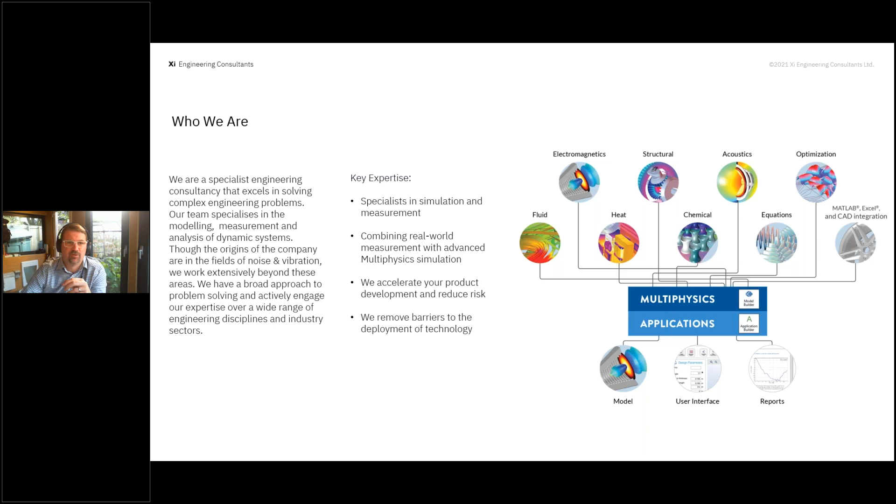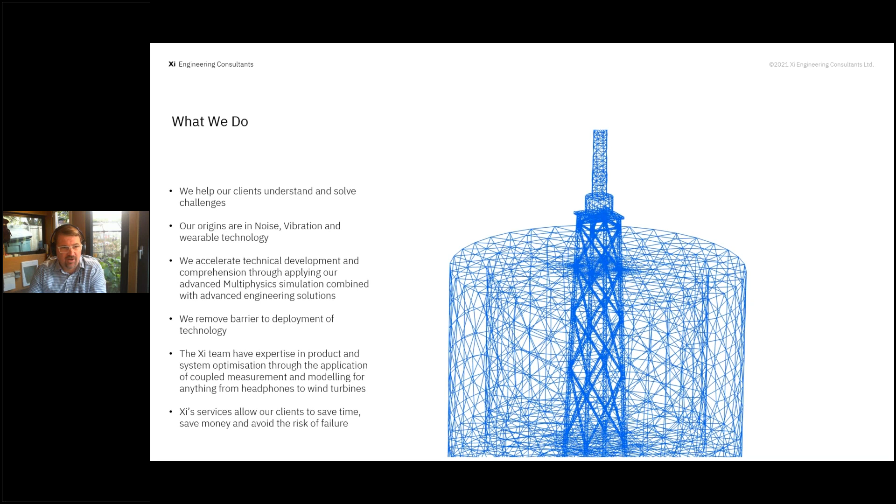Our origins were actually in noise and vibration. We spun out of Edinburgh University, where we did a lot of complex dynamic engineering. This has allowed us to improve our skills and capabilities to allow a lot of offshore deployment to be taken forward, removing environmental barriers. Sorry, I have a dog in the background. Xi Engineering, the name Xi comes from a damping ratio. We're a technical team, and we decided to name ourselves after a technical variable we commonly use in our work.

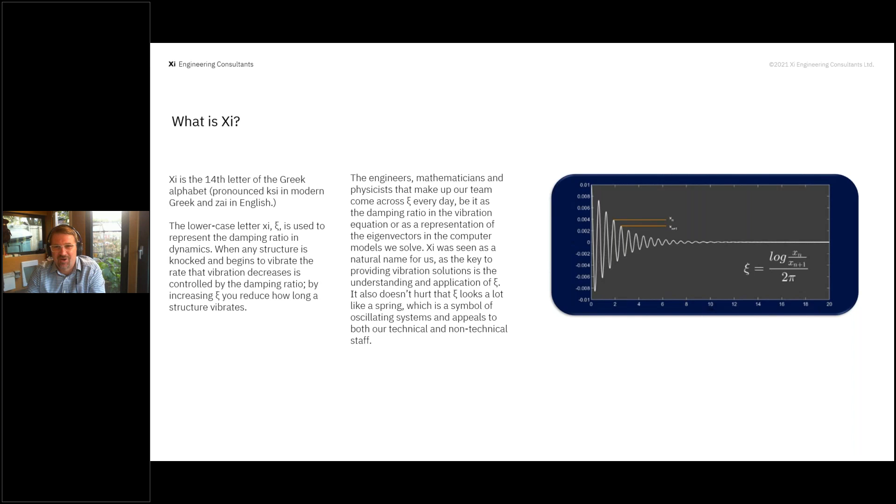As I said, we merge the virtual and real world. I'm going to give you a couple of examples of some of our digital twins and why they were produced, then some projects specific to the offshore wind sector. We worked with GE Renewables over in Germany, and they wanted to improve their wind turbine performance, specifically with relation to noise and the acoustic emissions. So what we did with GE was develop an acoustic model, a full holistic system. We measured in the real world, combined the two, and then we were able to optimize their system to reduce the acoustic emissions of the devices, allowing for increased deployment of the system.

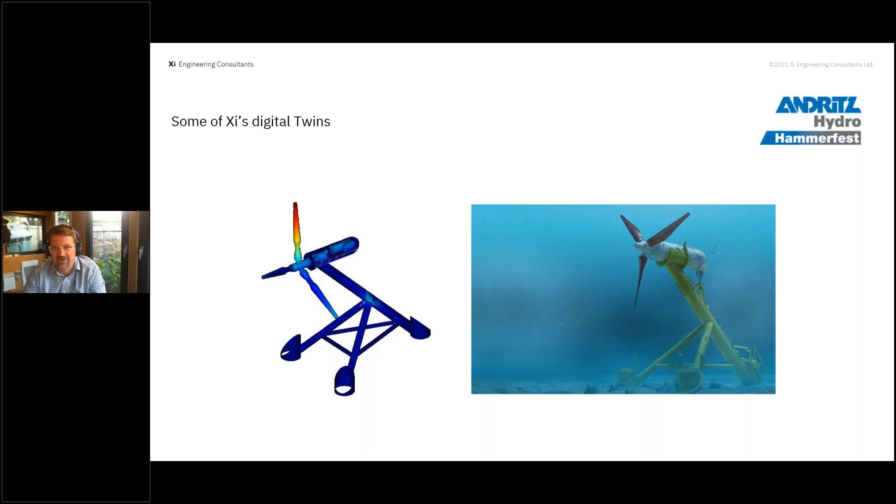Another example of a project we've worked on, this is Andritz Hydro Hammerfest. They have produced 3 versions of tidal turbines, the one on screen is the HS1000. We assisted the manufacturer in optimizing their system for being maintenance free - they wanted a 5-year maintenance-free period. During the design phase, we were integral in terms of reducing the fatigue and the likely maintenance requirements. At the same time, we were able to predict the acoustic emissions of the devices, which then allowed them to deploy these devices, understanding what the signature would be and how it would affect marine life.

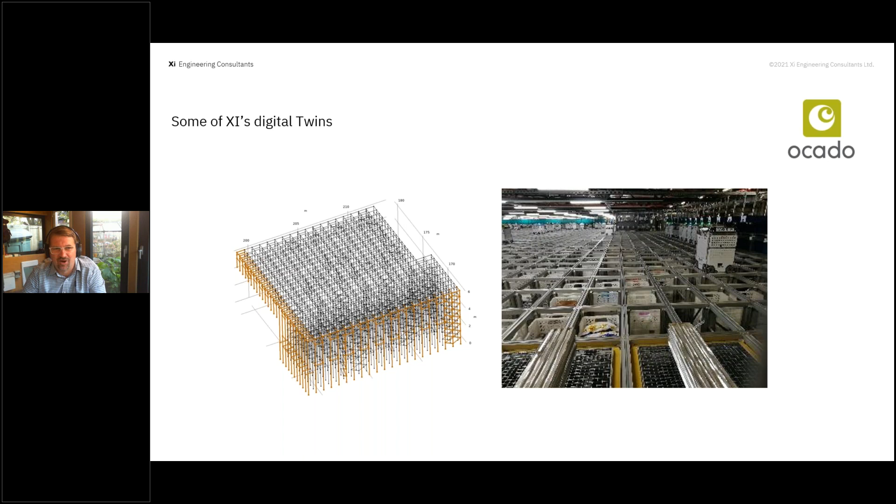And the last of the digital twin examples - this is clearly not offshore wind, but we work with Ocado Technologies, who are developing a robotics-based logistics system. This is a huge digital twin, some sort of 300 meters by 300 meters, in order to optimize the device for deployment across the globe.

So moving to the specific area we're concerned with today, in terms of EIAs, I'm sure you're all aware of the EIA directive, which everybody works to within this field; certainly Scotland has its own take on this. Each of the different regions will do. And really, you've got to cover what all the impacts are going to be of a deployment of offshore wind. And the project's likely significant environmental effects need to be considered. A few of these I will now cover in this presentation.

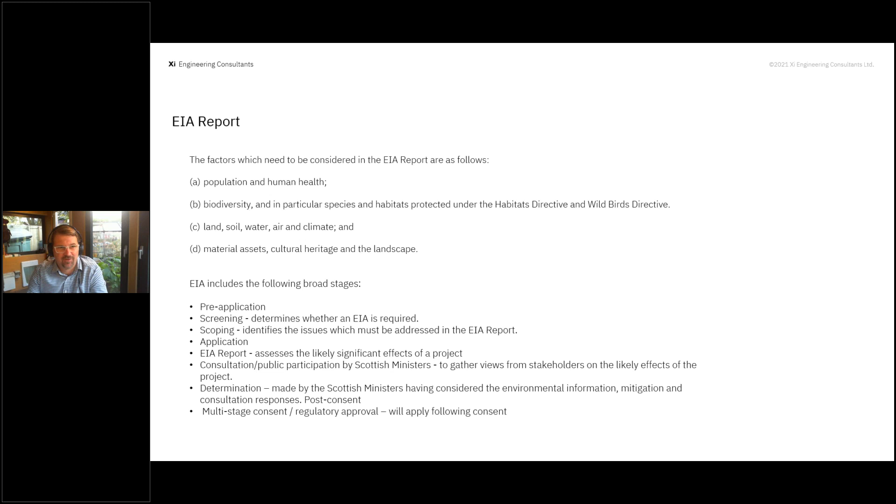As a summary for what's required in an EIA report, obviously it needs to cover a number of factors, you know, what the likely impact is on the population and human health. Biodiversity is one of the key concerns and the key areas we assist with in terms of ensuring that the likely output or the predicted output will not cause an issue to different habitats. Then you're covering basically land, soil, water, air and climate. And then obviously any material assets or cultural heritage must be considered through this process. But I'm sure there's plenty of people going to cover this in greater detail later on.

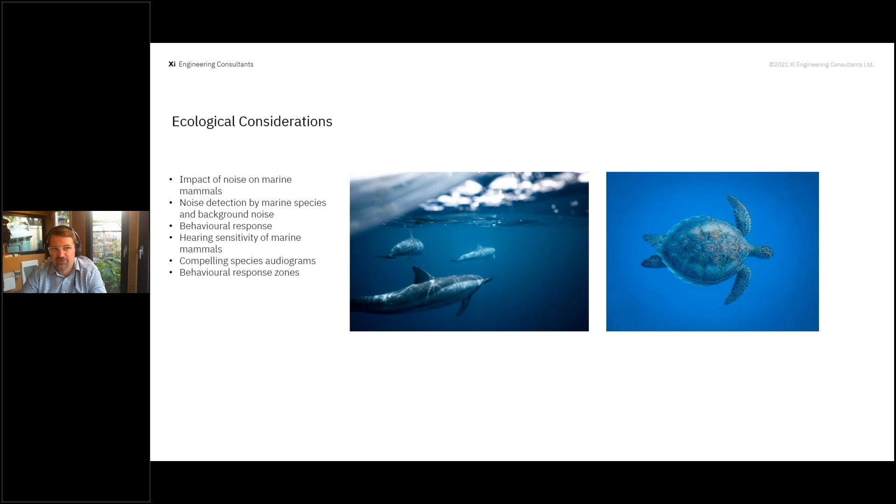So in terms of ecological considerations, you need to look at the impact of noise on marine mammals. You've got to look at the noise detection by these mammals. So can they hear it? Or what level would they hear it at the different receptors? And is there likely to be a behavioral response to this? Certainly from deployments we've done, we need to ensure that the marine species are aware of what's going on, but obviously not to a level at which you're likely to move a population because it's been too noisy. You've got to look at the hearing sensitivity of the marine mammals. And what we do is look at the species audiograms and then assess what the likely behavioral responses are.

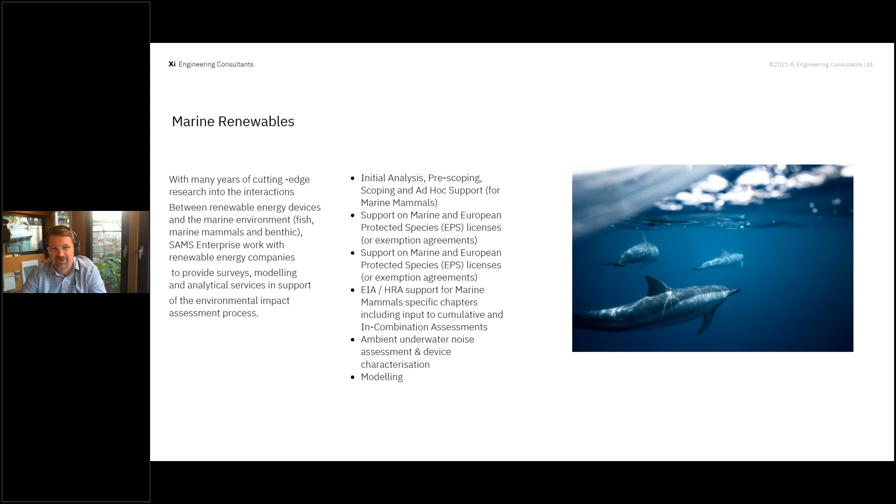So in terms of marine renewables, you need to cover a number of steps, looking at initial analysis or pre-scoping, which we and our partners can provide support for. Looking for support for the marine and European protected species, which are key to consider, and we look at the audiograms of all of these when we're predicting the noise levels. The EIA and support for marine mammals, covering specific chapters, and then looking at both the ambient underwater noise and the likely effects during construction, operation, and decommissioning. And we do that through some extensive, accurate modeling.

So to give you an example of some of the underwater projects, I'm going to run through them before I finish up, and then I'm happy to take questions. But we cover areas such as piling noise, so we're able to predict the piling noise and what the likely effects are. The operational noise of wind turbines, the foundation effects of offshore wind turbines, tidal turbine operational noise. Obviously, we're focused on offshore wind here. But then you've got to look at the facilities onshore as well, so whether or not facilities onshore are going to affect marine species. You've then got cable laying and the noise that might be an issue there. And within the UK, we have to look at what the Ministry of Defence, the MOD, requirements are. So you can see on screen here a picture of the HS1000 being deployed, and the sound production of the device, which we can simulate and combine with the bathymetry in order to show what the effects would be, whether it were deployed as a single device or multiple devices.

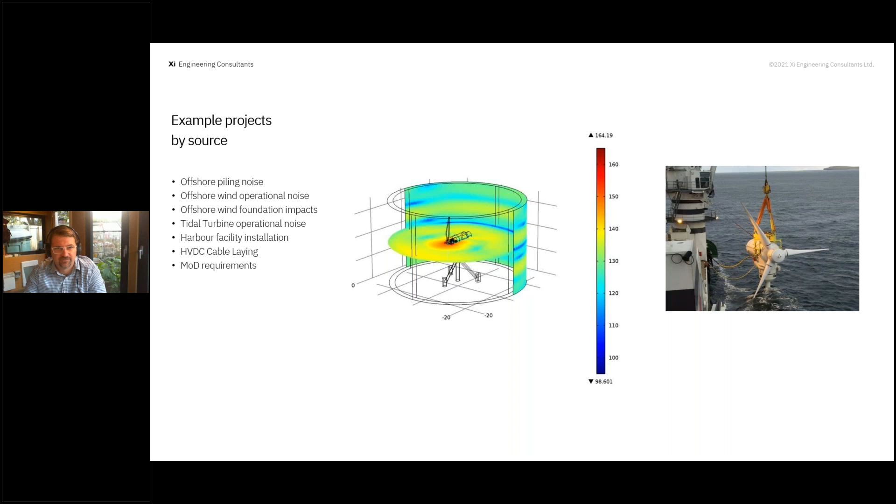We've done extensive work with the Scottish Government and Marine Scotland. One of our publications is available on the Scottish Government's website, if you're interested; there's a link in this presentation, so hopefully it will be distributed at the end. What we looked at here was what the different effects of operational noise would be for different types of offshore wind turbine foundation. So we looked at pile foundations, gravity-based systems, and jacket systems, and how each of these would impact the different species.

So as I said, this report's available. I've got some of the highlights here from it. So we have on the screen the sound pressure levels at different frequencies as produced by a pile foundation. Obviously these are device specific, but we're quite happy to produce these for any scale of turbine so that the consenting authorities understand what the operational noise from these turbines is likely to be, and the effects that they have on the different species.

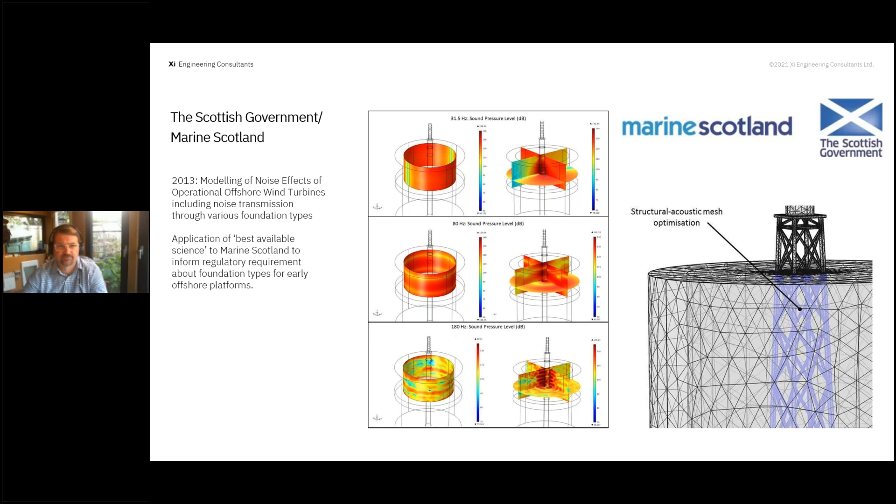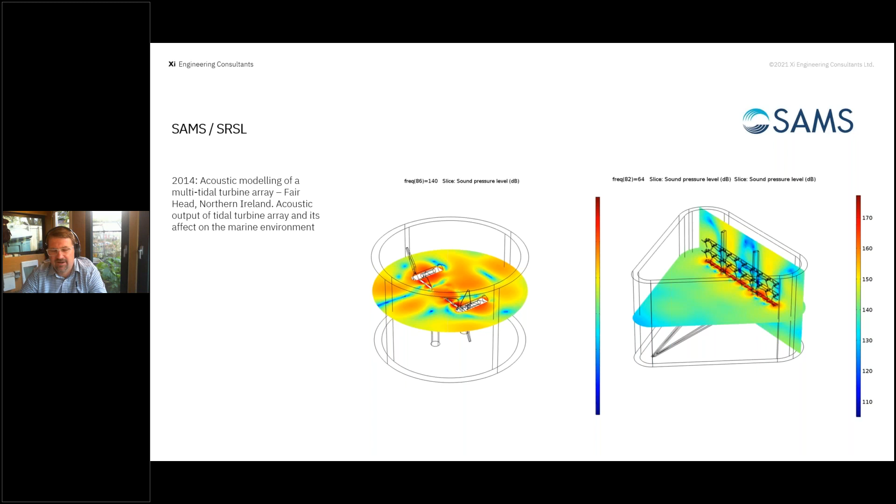Another underwater project, this one we worked with SAMS and SRSL. So again, this is tidal devices, but we were looking at how different devices underwater would affect the different species, again through producing a propagation modeling capability, and then we put this into the bathymetry, and then you're able to see what the likely effects are.

I think I've covered the Andritz Hydro Hammerfest, but here was a specific site in terms of the noise propagation. To the left of the screen, you can see the effects of multiple devices deployed simultaneously by the islands of Islay and Jura over in Scotland.

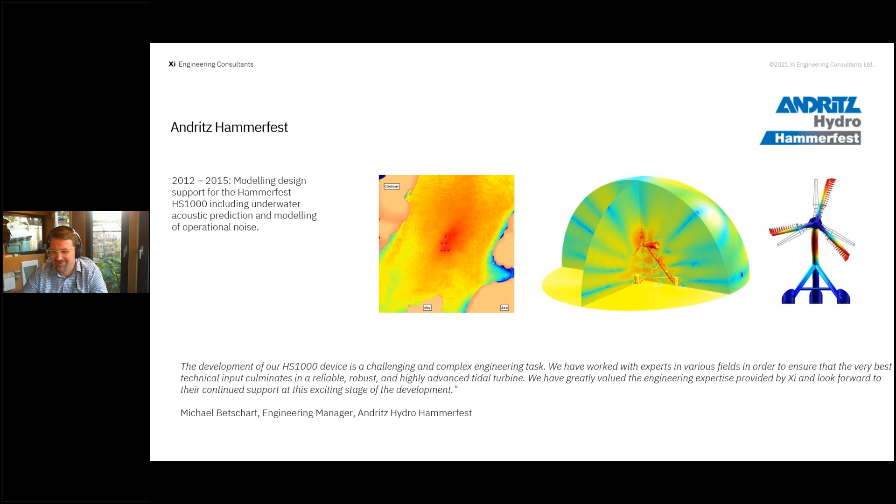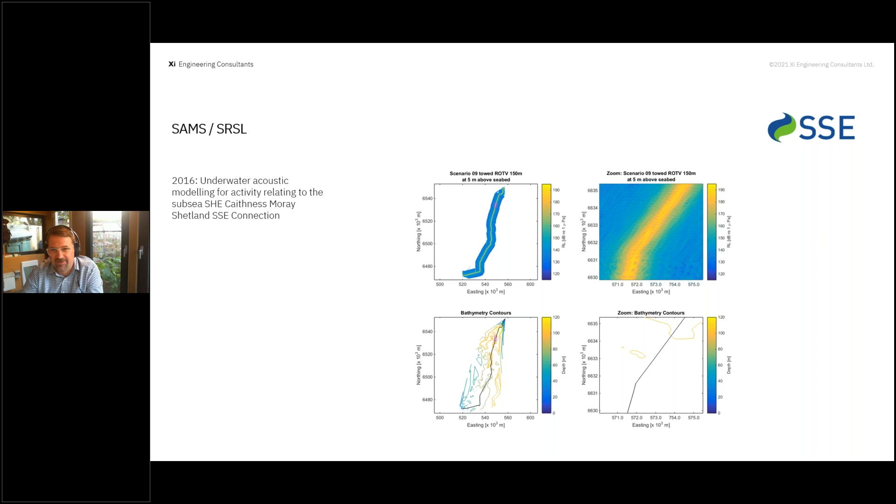Obviously, when it comes to cable laying, it's another area you have to assess during your EIA. And we've worked with numerous companies now. This one was specifically for SSE, again with SAMS and SRSL, where we were looking at the impacts of the cable laying and activities in getting the cable to the Shetland connection up in the north of Scotland. So looking at the different activities, we combine it with the bathymetry, and again we can propagate the noise, and then we can also see what the effects are on the specific marine species.

Another underwater tidal device, this is the West Islay Tidal. What you can see is a sound pressure level created by different numbers of devices deployed on the seabed, combined with bathymetry, and once again we'll then look at how that impacts on the specific species, looking at the different mammals, dolphins, whales, and also migratory fish, such as the salmon, sea trout, and the eels.

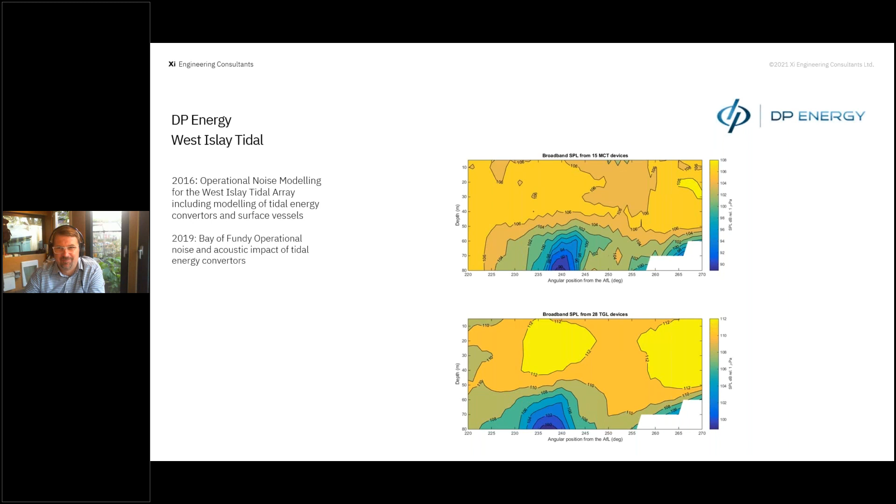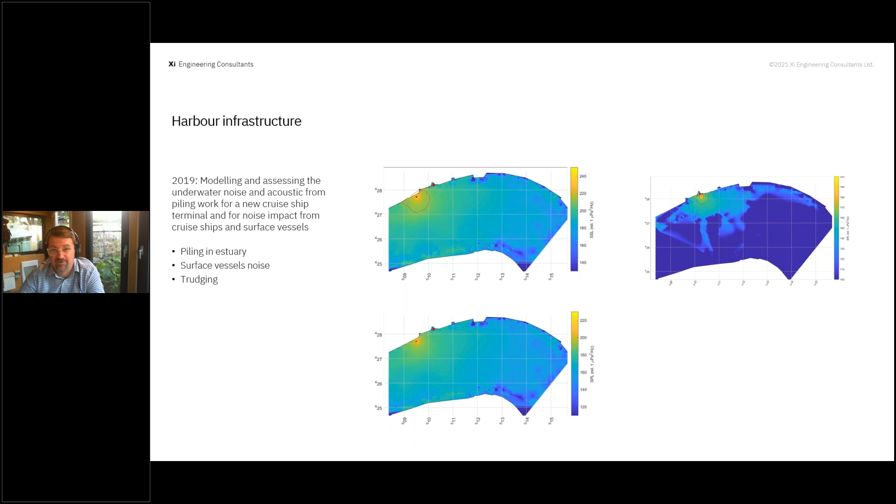So once again, we look at what the activities are going to be, and we can produce the underwater noise impact from the piling and the onshore activities to ensure that planning authorities allow for these to go forward. So you've got piling in the estuary, you've got vessel noise as well, and dredging running through.

Oh, sorry, I've rattled through that presentation, so I'm slightly ahead of time. My apologies. Hopefully I've covered all those points, but would happily take any questions on predicting offshore noise and acoustics in order to allow for your deployment of offshore wind.

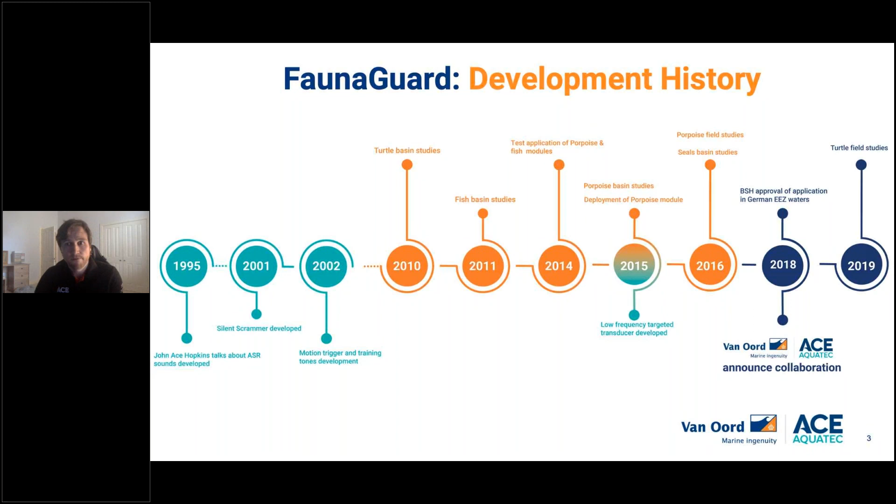So within the partnership, we are responsible for dealing with client contact, shipping, servicing equipment, as I said, and Van Oord have been largely responsible for the networking, communication, research, market intelligence, and promotion, online events.

The FaunaGuard systems combine academically validated sound patterns devised by the Van Oord partners and noted experts Ron Kastelein and Hans Slabbekoorn in the Netherlands, with award-winning transducer devices that have been designed by us, and also Neptune Sonar in the northeast of England. And effectively, by introducing sounds at specific frequencies, we can ensure that any impact of loud sound-producing activity on marine life is minimised to the client's satisfaction.

So we have customers all around the world specifically requesting us to supply FaunaGuard for offshore wind projects, typically at the installation and commission stage, but in addition other marine projects such as unexploded ordnance clearance, power plants and sea turbines, spawning protection, oil spills. And you can see who our devices have been recommended by, who we've worked with in the past, a little bit of our relevant experience.

You can see in Hollandse Kust Zuid recently, in order to keep underwater noise level as low as possible, a bubble curtain was implemented there, which shields the environment from loud sounds. And the environmental impact assessment for that project also required measures for ensuring the protection of porpoises during the jacket installation, in terms of avoiding any risk of temporary shift in the auditory threshold.

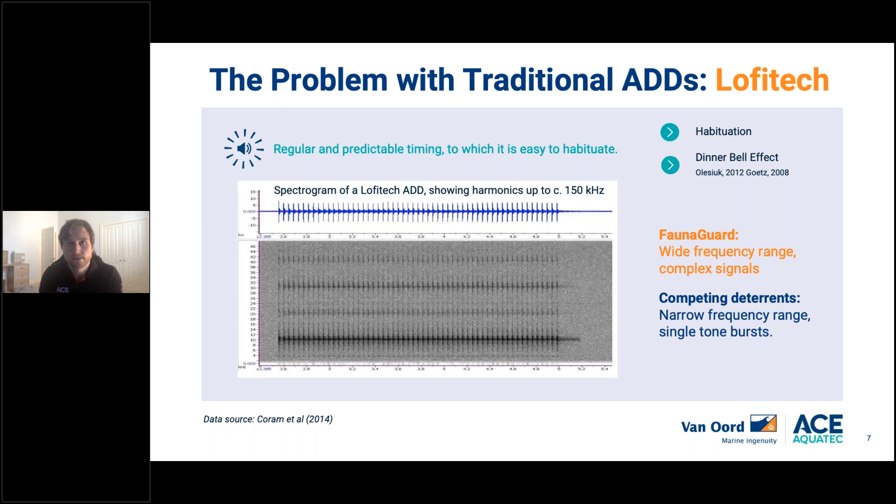We've got 4 jointly developed Fauna Guard modules, commercially available to marine contractors and other interested parties. We have our fish and turtle module, our seal module, and the porpoise module, which was the first of the 4 on the market when ourselves and Van Oord formed that strategic partnership towards the end of 2018.

The porpoise module is probably our most popular hire, given the prevalence of harbour porpoises. It's been approved for use by the Federal Maritime and Hydrographic Agency, also known as the BSH in Germany, for installation and deployment in the exclusive economic zone of German waters.

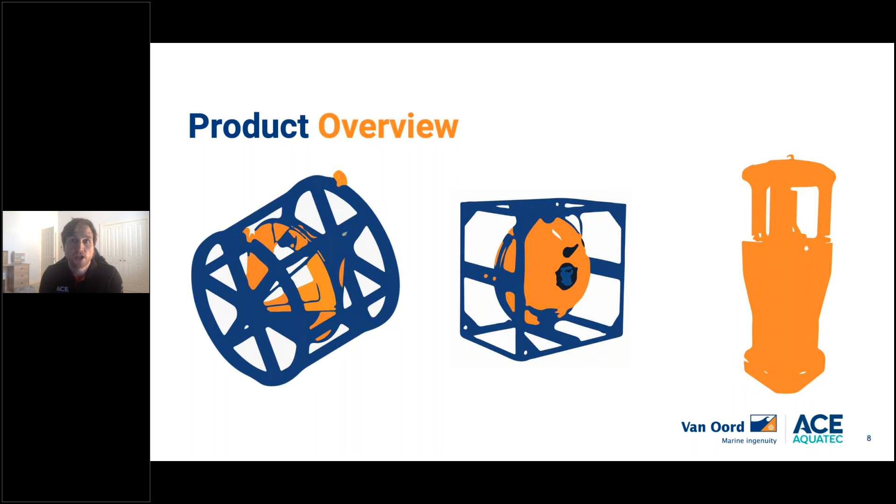Ultimately, the philosophy of Fauna Guard is to make optimal use of the hearing capabilities of various target species and focus sounds using modern acoustic techniques.

It can be deployed 15 to 30 minutes before the start of loud sound-producing activity, which can be dangerous. There's a soft start built into it, allowing animals time to move away before noise becomes potentially harmful.

A computer inside the control box produces sounds completely at random, with different tones that can be activated. They remain novel, so animals are less likely to habituate to our signals or tone patterns.

Although we use higher yet still acceptable volumes of sound to protect caged fish on sea farms in the aquaculture sector, our research has demonstrated that lower volumes have a greater effect when there's no food source, keeping marine mammals away from the area.

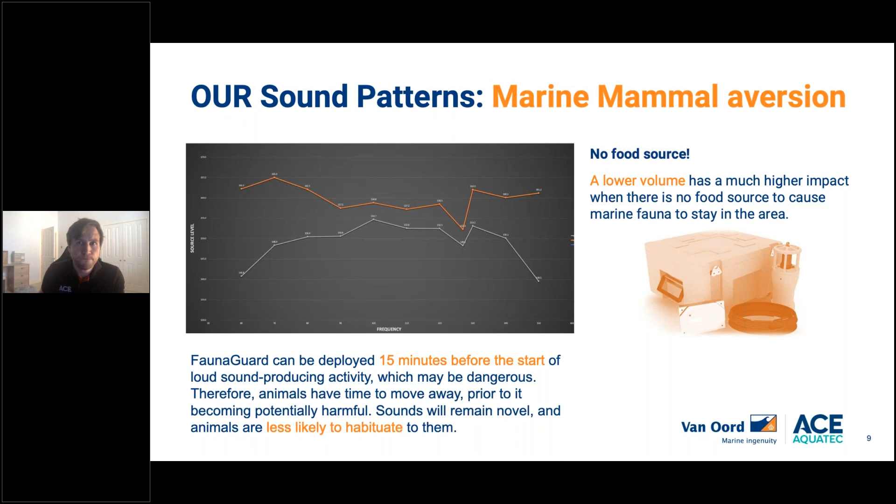In order to guarantee performance, we continue to collaborate with several marine research institutes and universities worldwide. Independent experts in marine biology and underwater acoustics are involved to determine suitable sounds and study their effectiveness, first under laboratory conditions, then basin studies, and finally with animals in their natural environment through field studies.

Each of our 4 modules, and any future developments, has to follow that complete path: literature study and theoretical sound development, then basin tests to determine behavioural response levels to the sound patterns, and then field tests to determine the success rate.

Each module comes equipped with a soft start, a gradual ramp up of volume, and is purpose built for the target species. But it's also possible to combine several modules into one device, such as our very low frequency fish turtle module and our high frequency porpoise dolphin module.

We also have available our original mid-frequency marine mammal mitigation device, for overlapping cetacean and porpoise exclusion. That device uses short, sharp tonal bursts, the original ACE Aquatec startle response, at higher volumes, as opposed to the low volume, long duration sounds emitted by the FaunaGuard devices.

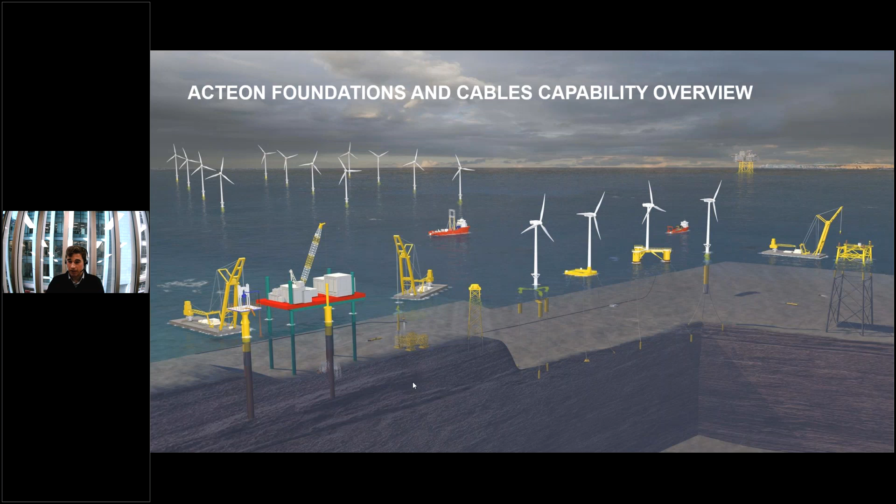Moving on to what MENCK offers: we've been on the market for 150 years now, and our hydraulic hammers are for rental and sale all around the world, operated globally by our in-house offshore technicians. We have a hammer portfolio throughout the spectrum, starting with 100 kilojoule all the way to the newest, and this is actually the world's most powerful hammer, at 4,400 kilojoule. In terms of top diameter of the monopile, we can service up to 8 meters at the moment - that is the capability of our hammer portfolio.

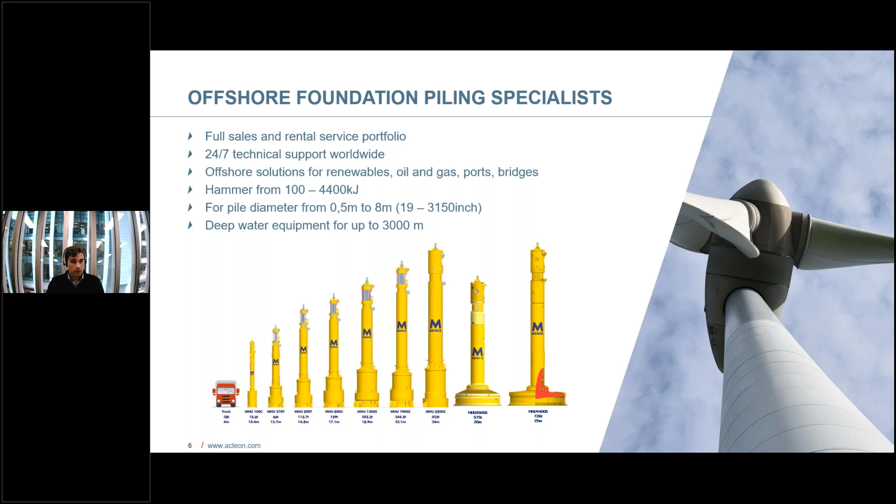Although that might not be relevant for fixed-bottom offshore wind farms, we also have deepwater power packs and hold the world record again of 2,100 meters for the greatest water depth where a pile has been driven. For the offshore renewable sector, we offer the MHU 3500 family, which stretches from 2,400 kilojoule all the way to the world's most powerful hammer, the MHU 4400 with 4,400 kilojoule power. So that's about Acteon and MENCK.

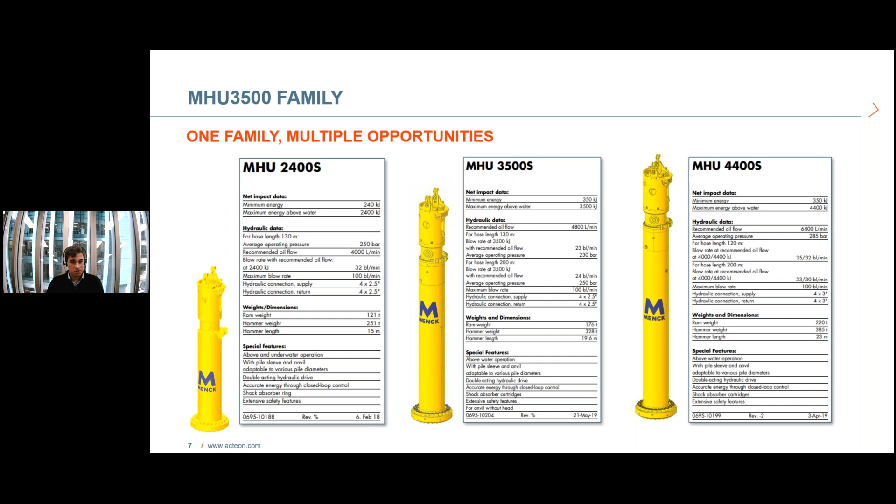Now, what do we think is the challenge we're all facing across the offshore wind sector in the coming years? If you look at the development of the offshore wind sector over the last decade and compare it to what's going to happen in the next decade, there's exponential growth in the number of offshore projects that will need installation and supply chain support. The per annum installation of offshore wind farms will go from 3.7 gigawatt to 26 gigawatt per annum, a 7-fold increase. Not only that, the output of the new generation of offshore turbines will increase up to 15 megawatt.

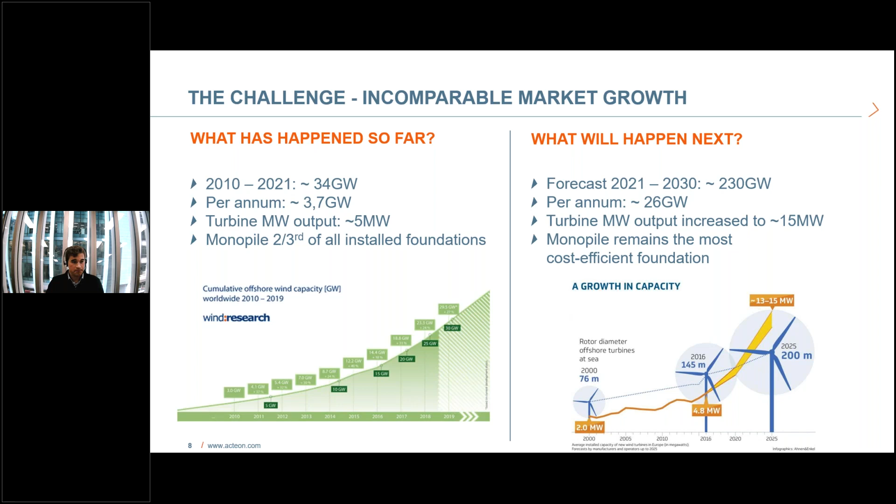While the monopile remains the most cost-efficient foundation, the fact that the turbine size will grow to such an extent has certain implications for piling. So what exactly is the challenge?

Well, the new generation of turbines being installed from 2023 onwards, and definitely for the offshore already, when we look at the predictions, or rather the plans of the offshore wind farm developers in the Polish Baltic, that's this kind of size of offshore wind farm turbines that will be applied to those projects.

So the implication is that with the greater size of the turbine, the underwater noise will increase. And as we've heard from the previous speakers, that is something that is very on the top of mind of regulators as well as developers, to minimize the environmental impact of piling installation. That is why, in a way, anticipating this development, MENCK, together with Novicos and the University of Hamburg, jointly conducted a research project from 2018 to 2020 to develop adequate strategies to respond to this projected increase in piling noise.

And what I can tell is that the results of that research are promising and will be implemented into a new hammer design for larger monopiles that will be used in the forthcoming project. So at Acteon, we always want to respond to industry demand and want to develop a world-class noise mitigation technology.

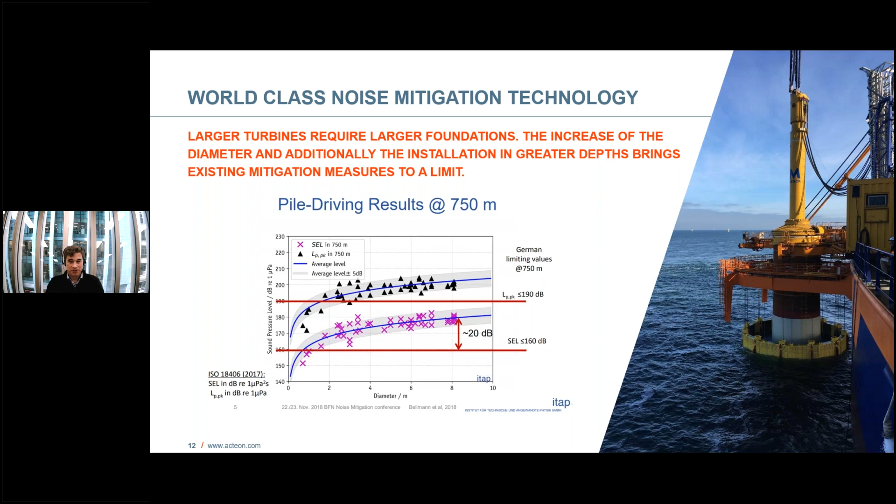And obviously, we've already spoken about the EU regulations in that respect. That's why we need to develop new technologies to make sure that this noise is being mitigated adequately.

So, looking at the graphic that Fabian Wilke presented some time ago, a reduction from 180 decibels to 160 decibels means a reduction of a factor of 10, corresponding to 90% absorption of the energy in the water. And in order to achieve that reduction, several underwater noise mitigation measures need to be in place. At the moment, the practice is using secondary noise mitigation systems like bubble curtains or near-field systems like ADBM, which limit the existing noise levels underwater. In other words, absorbing the energy once it is in the water.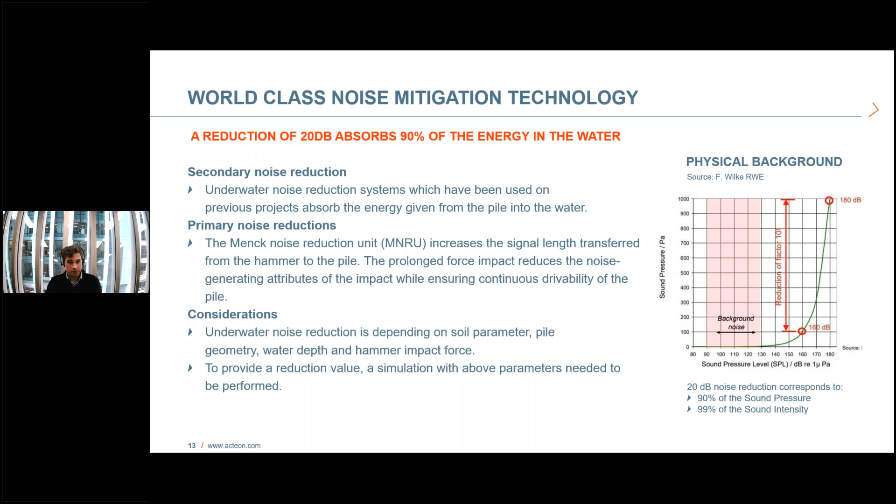Well, what we want to do is to reduce the energy before it is given into the monopile and then from the monopile into the water. So how do we do that? Well, we identified—our R&D department, our very capable engineers did that—identified that the force character of the hammer is a very promising parameter of optimization.

And we developed the Menck noise reduction unit, which can be assembled onto the hammer. And it will increase the impulse length of one blow of the hammer. So changing the force character and introducing the force over a longer period of time will allow us to get rid of the peak force in the structure.

And with this reduction, we achieve, using simulated models, a significant reduction of between 7 to 9 decibels. So this is a very, very promising development, one that will really allow piling installation for the larger monopiles, for larger turbines, to really stay within the bounds of the current regulations.

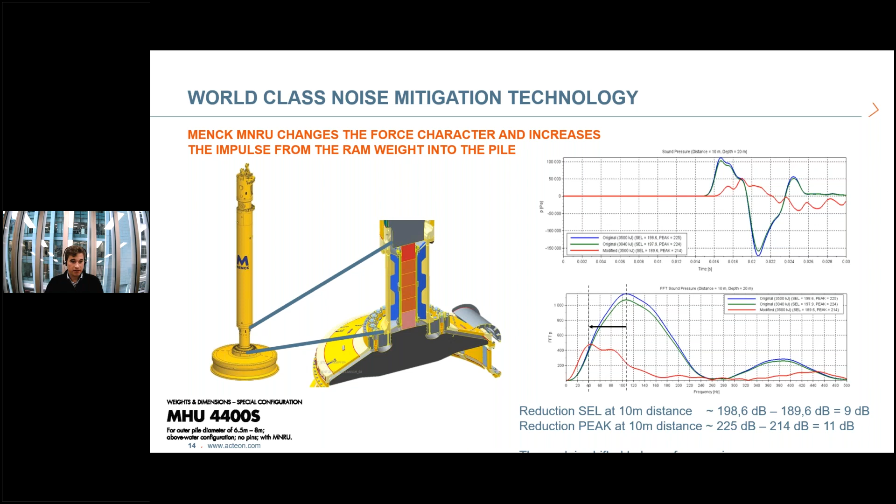So to sum up the Menck portfolio and the offering, well, we offer state-of-the-art piling solutions, and the parameters of our hammers make them the optimal solution for both monopile and jacket foundation installation. And as I mentioned, the proprietary Menck underwater noise reduction unit, MNRU, has been developed to address the ever-increasing demand to meet regulatory limits on underwater noise.

Underwater noise pollution is an essential challenge today, and Menck and Acteon Group is committed to contributing to the sustainable development of the offshore wind sector. And the Menck noise reduction unit can be added as a component and integrated into any Menck monopile or jacket foundation.

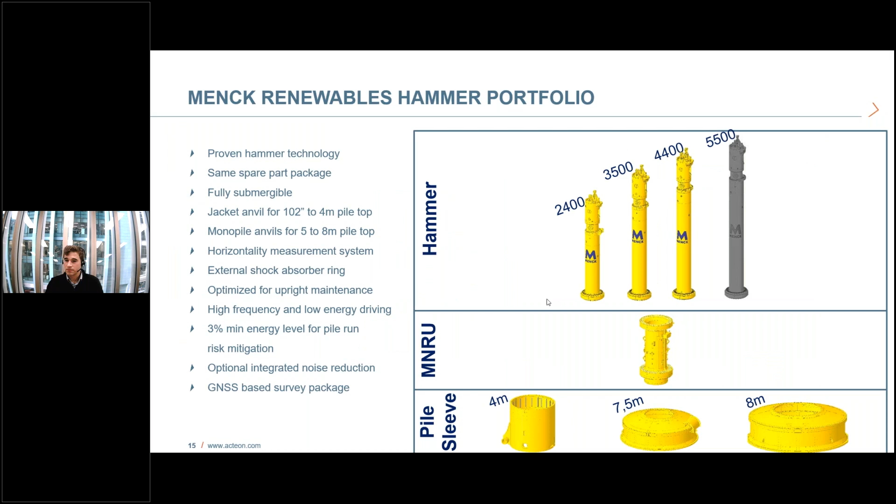So moving on, at Acteon, we firmly believe that the whole supply chain needs to work together to solve the challenges that come with the growth of the offshore turbines, the offshore monopiles, and the correlated increase in noise.

So how can we support the incoming projects in Poland? Well, under protection of an NDA, we can provide and are prepared to share detailed information about our hydraulic unit in order to allow independent third parties who can model or simulate underwater noise with detailed design data about our hammer. This will enable developers and designers an independent view on the optimization and the expected underwater noise level.

In addition, we also support all developers with drivability studies. So that's something that we are more than happy to offer as well.

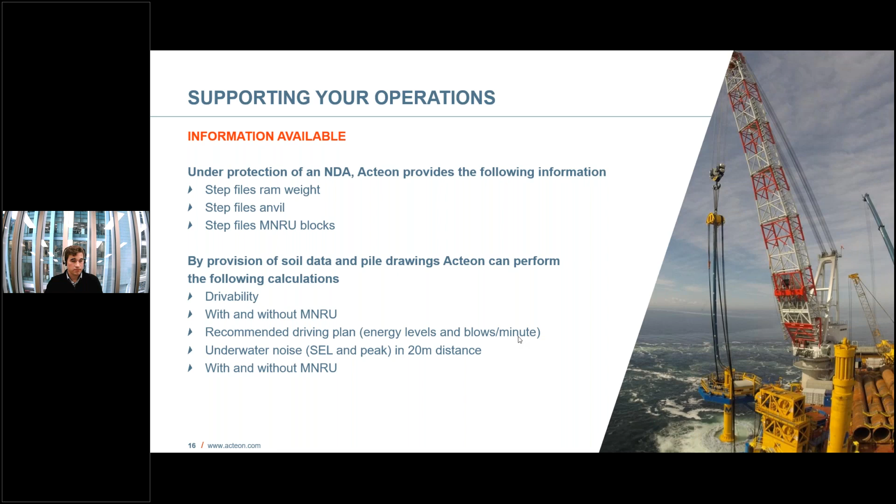So onto our track record. Well, we, as Acteon and Menck, have worked all over the world on offshore wind foundation installation, particularly in Europe, in the North Sea, as well as in the Baltic Sea.

Two projects I'd like to mention briefly: the Wikinger offshore wind farm in the German Baltic, where we took part in the installation of the jackets with Menck, with UTEC providing support, as well as designing the pre-piling template for the jackets, as well as Kriegers Flak in the Danish Baltic Sea, where we pride ourselves on having installed 72 monopiles in record time.

At the moment, we are working on Taiwanese offshore wind farm projects, as well as on Europe's currently biggest offshore wind farm, Hollandse Kust Zuid, that is being developed by Vattenfall.

So to sum up, what is Acteon about? Well, we always take a proactive approach and want to innovate for our customers and clients to ensure that we can support the developers and other clients in successfully delivering renewable projects on time and within budget.

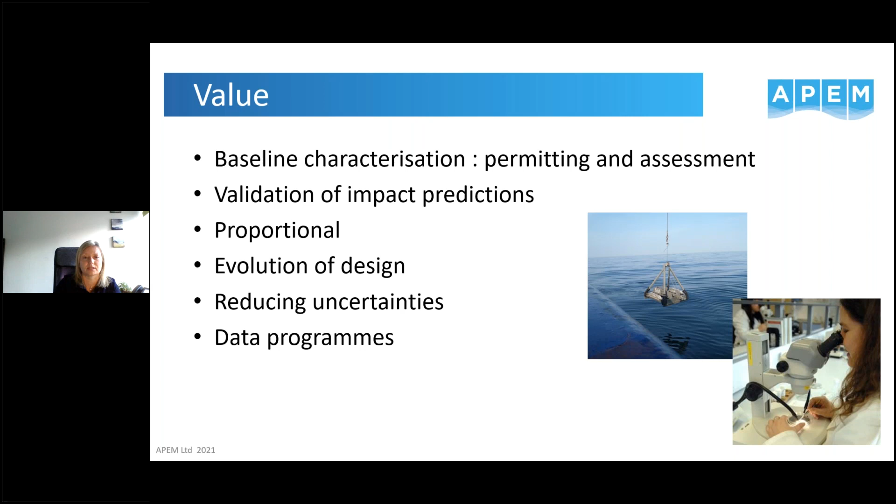As mentioned previously, standardisation is also very important, but there should be a recognition that while it can drive consistency in being able to collate data sets, there's also a need for evolution. It should be knowledge fed, with a feedback loop to enable improvements. So we can look to see collation of data at the national level, European level, and also contributions towards wider data sets, such as examples and data programmes presented here.

So, across the European level, any of the data that we're gathering in terms of the offshore wind farms themselves during that construction or operation can be used and very successfully contribute towards wider data sets. The Joint Cetacean Protocol in the UK, for example, it's run by JNCC, that enables us to collate all our data that we're collecting, typically from digital aerial surveys, on marine mammals and put that into a wider data set, which then can be shared and used for many purposes.

JNCC also hosts the UK Noise Registry, which can then contribute towards and is used towards measuring good environmental status for the Marine Strategy Framework Directive as well. The other point to showcase here in the UK is really ensuring that data sharing requirements are actually mandatory. So those are stated within the lease from the Crown Estate. So that ensures that anybody that's building an offshore wind farm has to provide that data, and that's made publicly available in the Marine Data Exchange that's listed on there.

So just to give a specific example of the benefits of actually having guidance there, thinking a bit more widely about benthic environments as well, specifically looking at development of a guidance from Natural Resources Wales. This was looking at the benthic habitats and setting out overarching principles with regards to sampling for benthic habitats for marine developments, so offshore wind and cables, but also wider. It was really important in this regard that it set out those key principles, but was not overly prescriptive as well. Because there is a recognition that there does need to be tailoring of those to site-specific nature and scale

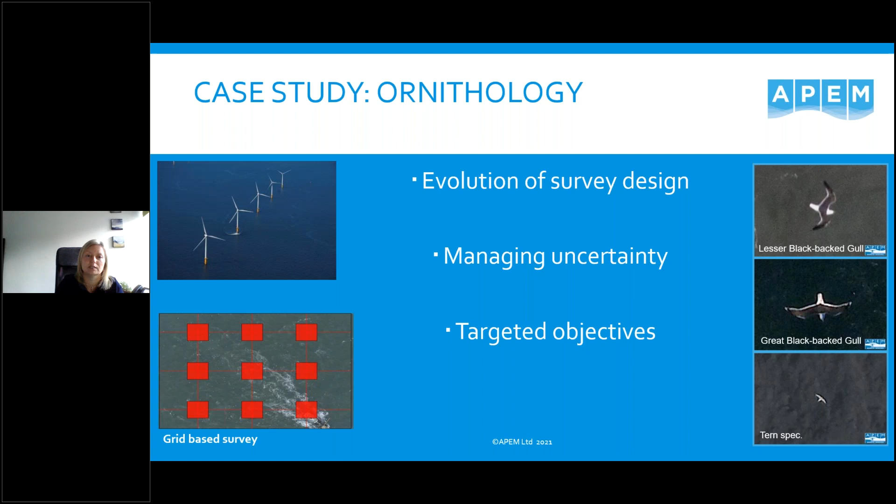As I say, it's really important to understand the difference between the characterisation studies that we do and dedicated monitoring or focused monitoring. This again is just one example where we looked at monitoring design at Greater Gabbard Wind Farm in the UK.

So we were able to prove that the hypothesis was correct, looking at avoidance rates. So we are actually able to generate avoidance rates from that study, which have then been used by the nature conservation bodies in terms of their recommendations on what avoidance rates to use within collision risk modelling, within the impact assessment. So it's really important that we do share that information. We look to reduce major consenting risks to developers by reducing precaution in our assessments.

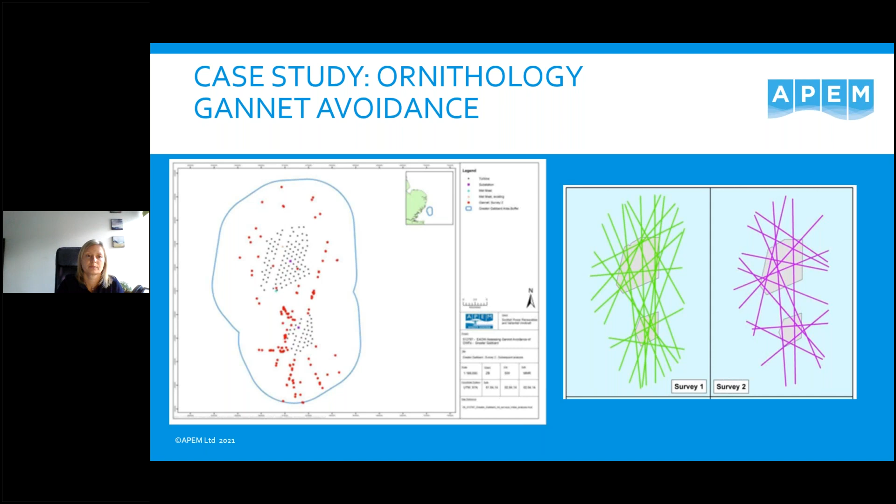So just to finalise, summarise, in terms of recommendations, it really is about being aware of, when you're scoping your survey in the first place, what you can do, what you can combine. Think about the wider context and targeted objectives, whether you can actually combine the objectives of some of your studies, so whether you're looking at initial geophysical surveys and the use of that for benthic characterisation, to then look at targeting and doing on-site validations, looking at establishing limitations and understanding the variables, recognising that developers aren't able to carry out a lot of the research that still is required within the offshore environment. There are an awful lot of gaps there.

But also recognising that ecosystem models do need to confront that uncertainty, and there are ways through collaboration that we can get more useful data sets for management decisions. Looking at future proofing as well, not being scared of deviating from standards where there is evidence that that is improving it, and allowing some of that innovation to come through, looking at best available technologies, and also being aware of the changing policy and planning environment as we go through realms of environmental regulations.

So yeah, importantly, plan and consult with your stakeholders, look at regularly reviewing the process of your data collection and check it against the original objective. And really, by doing that, you should hopefully manage the expectations both from the regulators and their advisors, and ultimately promote the results. There are additional benefits to just the projects themselves, and that can be useful to the wider environment and also help us in terms of delivering sustainable development goals. So yeah, hopefully you found that a useful oversight.

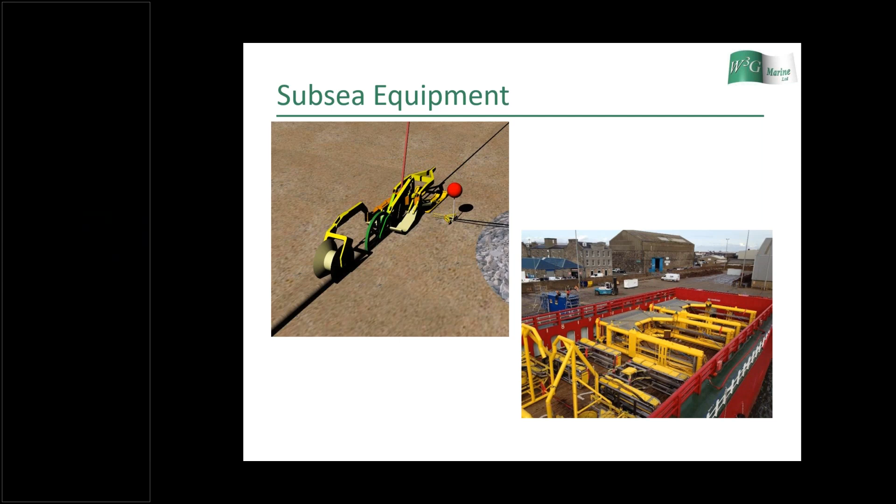The picture you see here, it's a pipe lay system. It's called an HLS, a horizontal pipe lay system. We built this for DOF Subsea. This equipment has been mobilized many times in different configurations and with different adaptations.

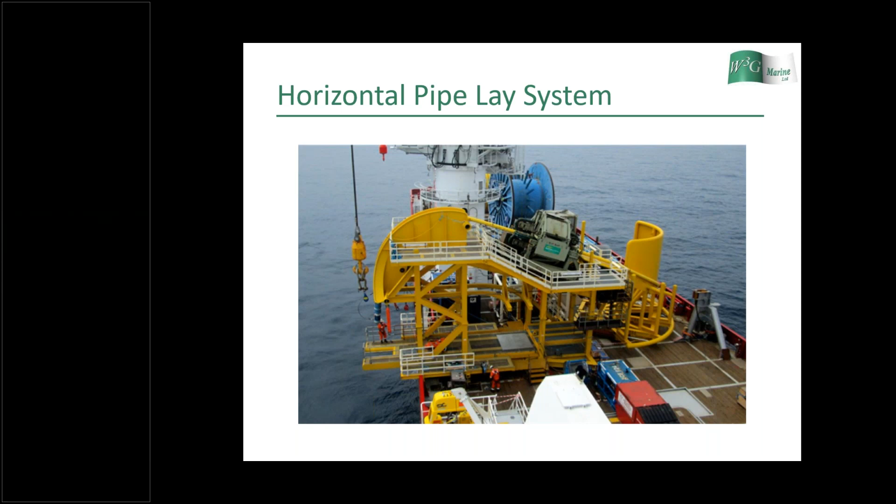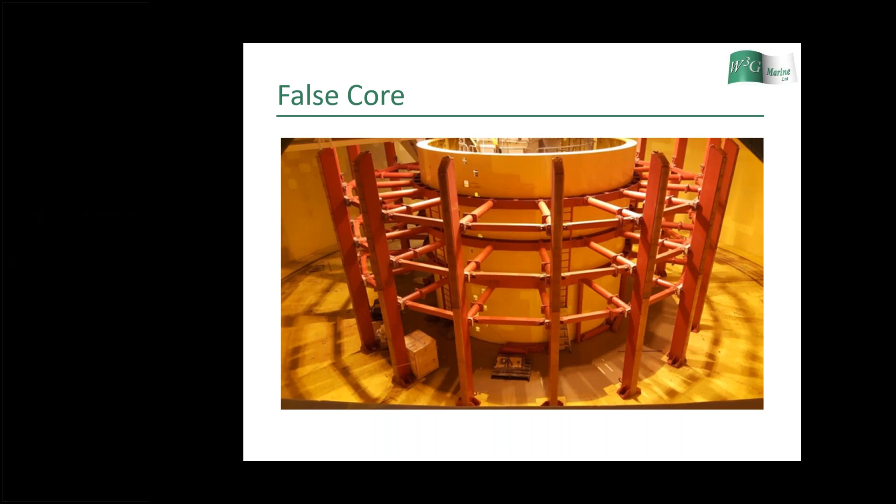And the final example project that I'd like to share with you is the Kincardine Offshore floating wind farm. It is now the largest floating offshore wind farm in the world. We have been acting on the owner's behalf. The owners are a company called Kincardine Offshore Wind Limited, which is a subsidiary of the Spanish construction company Cobra. So our involvement in that has been as owner's engineer and project managers.

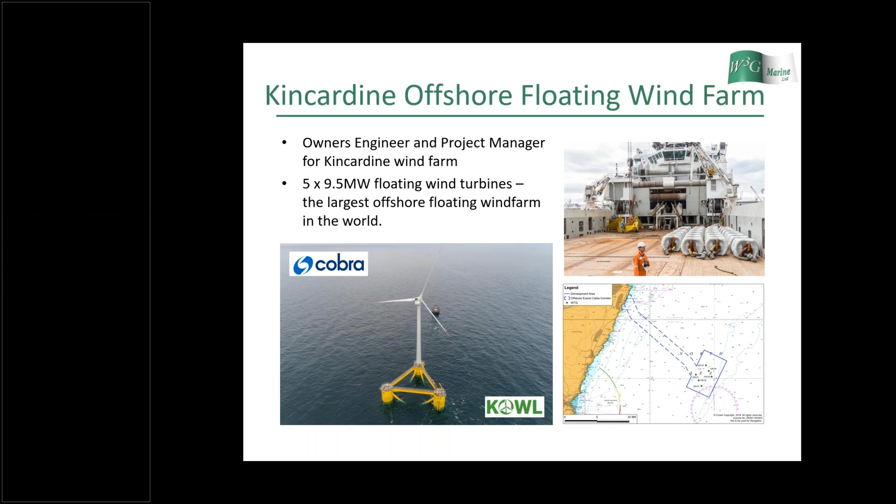Okay, if I move now to the first technology that I'd like to present, which deals with the issue of underwater noise. And in the context of offshore wind, really at the moment it's offshore piling that is the largest concern. You'll all be aware that when you drive a pile, you make a large noise, and in certain places of the world there are regulations to be met, and there are various different schemes on the market and in development to deal with this issue.

Things like a scheme with tuned bubbles, plastic bubbles. There's bubble curtains, which we'll all be aware of, and there's another scheme which uses a concept of impedance mismatch, where they capture an air gap through the water column in two steel tubes. Now, the scheme we developed relies on exactly the same principle as that. However, rather than using heavy steel tubes, we use a material called drop stitch.

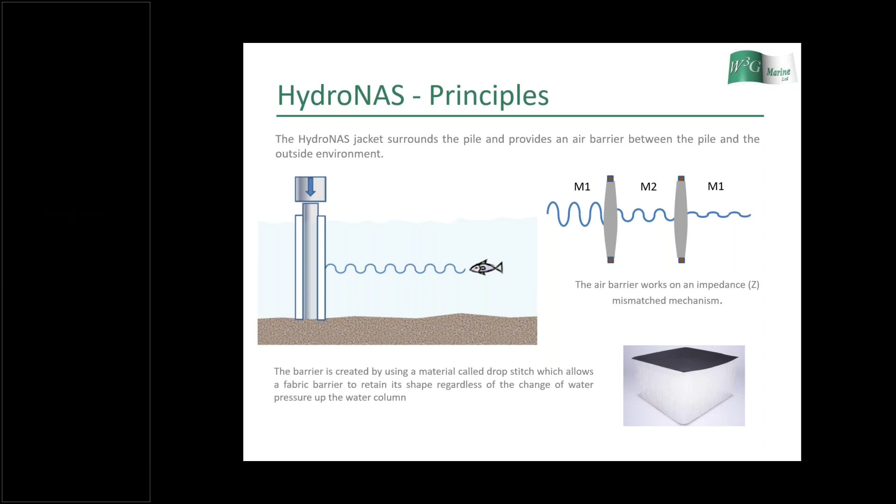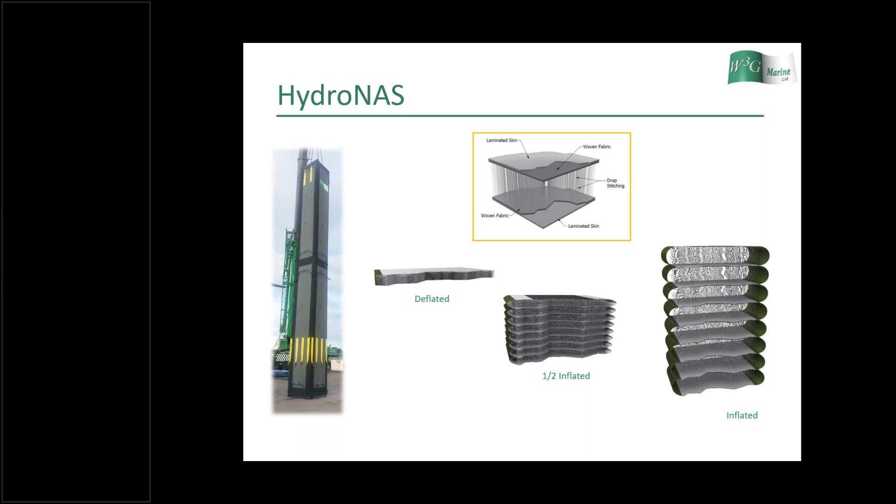Now, the picture on the left is a test piece that we trialed in Dundee Harbour, and the three pictures show it deflated, half inflated, and fully inflated. When it's deflated, it is just like sheets of rubber, and it expands to whatever depth of air gap is required to meet the noise threshold. Let me go back a slide. I think I missed one there. I've gone one too far.

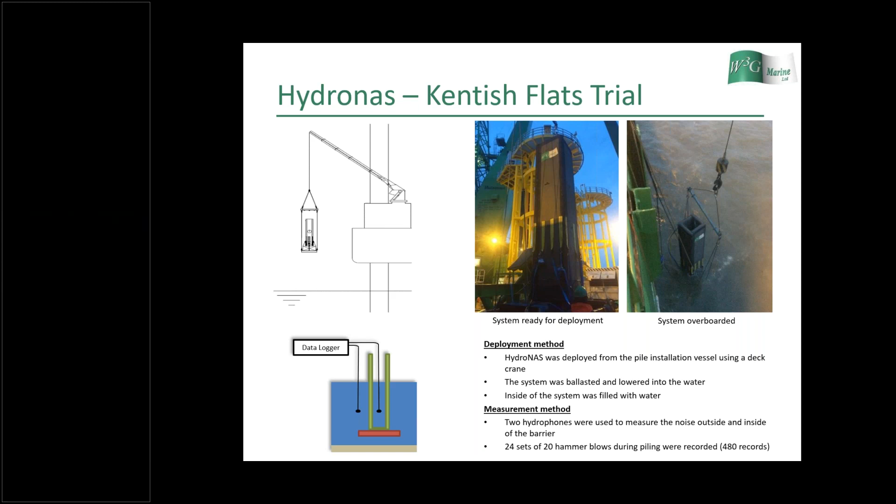If I go back a slide, this was the results of that trial. I don't intend going through this, but we will be sharing the presentations with you, so you can interrogate and look at this afterwards. We see the system as high performing.

The tests we did have demonstrated that, and we see the system having many other benefits, like minimal vessel downtime, because the deployment can be off the critical path, and minimal deck space or payload requirement. It's compact, it's lightweight, it's rubber with thin strings inside.

It can be air freighted, and it can be incorporated into a piling template or a gripper arm. At the moment, I guess we're looking for opportunities to deploy this technology, particularly in the context of turbines, and therefore substructures and piles becoming larger and larger.

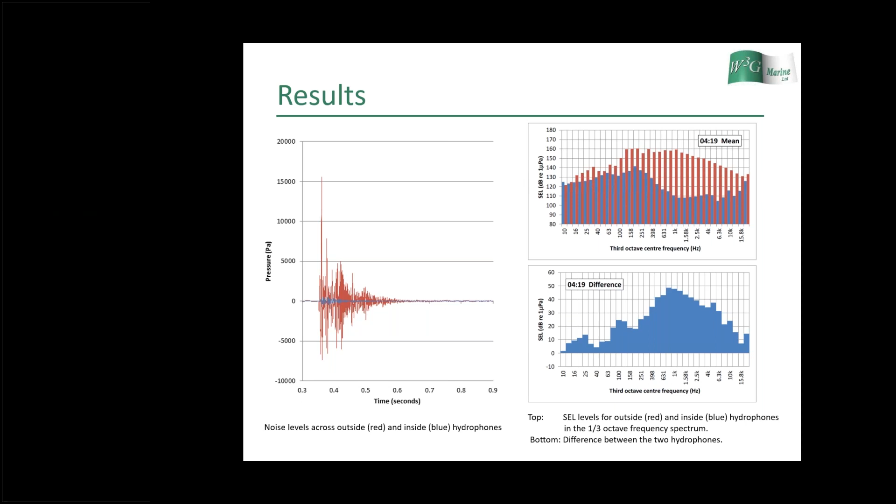So if I move now on to the second technology I'd like to speak about, called the foundation stabilization tool. Sometimes when a jacket is deployed offshore, it goes on to piles, pre-driven pin piles, and then cement is poured in which sets and holds the piles in the jacket firm.

One of the issues has been the movement of the jacket from the ocean, and that has caused problems with the setting of the cement. There is actually a DNV standard on this now, where certain criteria have to be met for grouting operations.

There are several technologies on the market. All that I'm aware of use hydraulic rams, and in effect they push the jacket and pile apart from each other to hold it firm.

All the sub-surface, the sub-seabed equipment is generally lost. It's covered in cement and it's lost, which is quite expensive gear to be down there. Our system, the W3G system, what we call the foundation stabilization tool, the FST, uses low-cost components. It is sheets of steel in an innovative shape with different types of welding at different points.

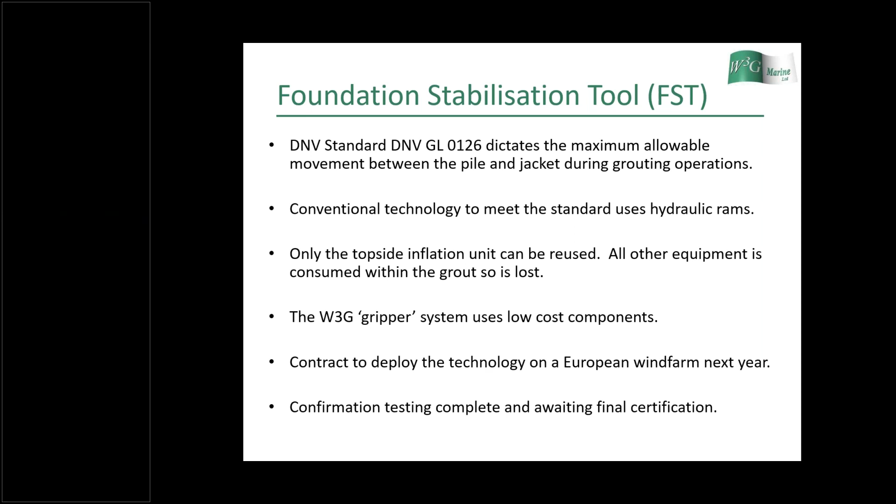So we have the gripper system at the bottom, where the jacket stabs into the pile. We have a scheme to inflate it, so there's a series of hydraulic hoses run up inside the leg, and it connects up to a remote inflation unit. This is a reusable package which can be operated remotely from the grouting vessel or installation vessel.

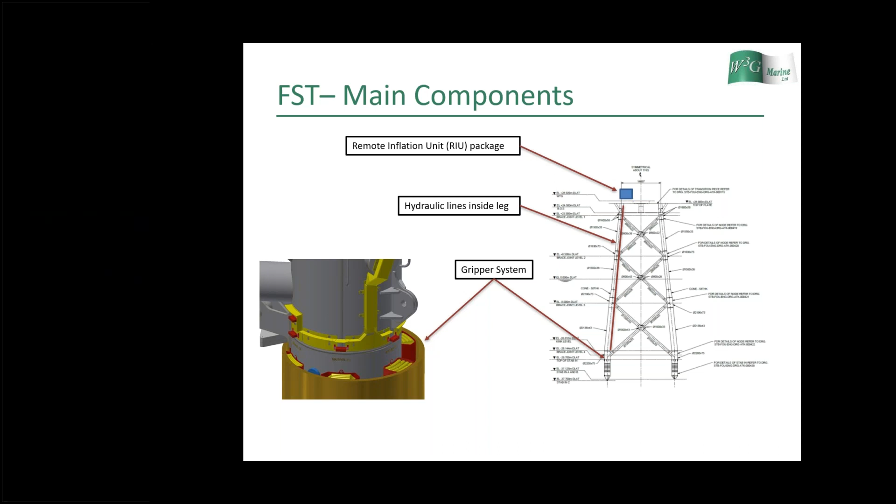This is a bit more technical detail. I won't go through all of this, but if anybody has any questions, I'm happy to answer them. You'll see in that top picture the red, salmon pinky coloured parts - those are the grippers, and the blue lines inflate, they pump water into the grippers and they expand to the required width to provide the stability.

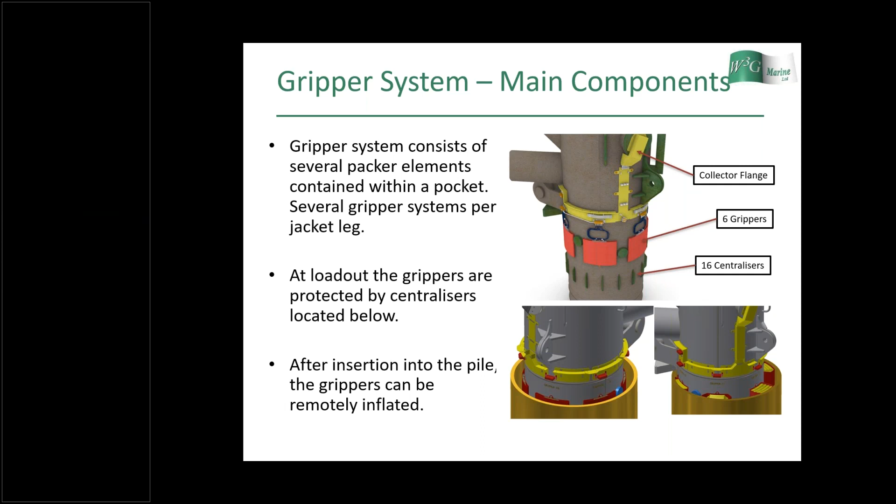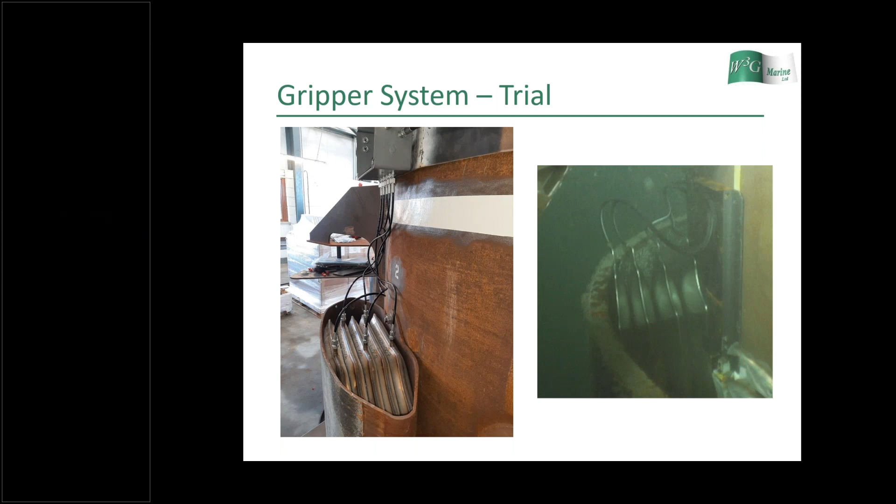As I say, this product is weeks away from being certified, and when we're finished that, we're looking for opportunities to use that on projects that require it. Not all do, but some jacket installations do. So thank you for that. I'll take any questions if there are any.